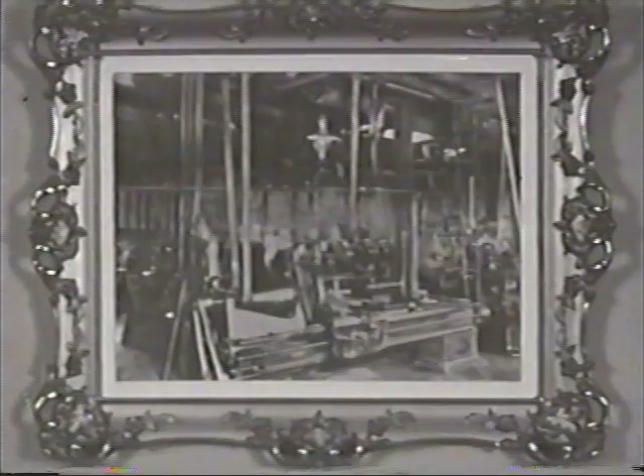This was the same year that a little machine shop was started in the shadow of the budding automotive enterprises in Detroit, a business that was to parallel in engineering development the growth of this first mass production industry. Established by Milton O. Cross and his father, Charles W. Cross, this company began building what is believed to be the first valve-in-head gas engine.

But in this gas-lighted era of the automotive industry, practically all Detroit shops were drawn into production of some needed parts for the assembled cars of the age. Cross, being gear specialists, among other things, became a major supplier. There were transmissions to build, steering gears, timing gears, and axle differentials.

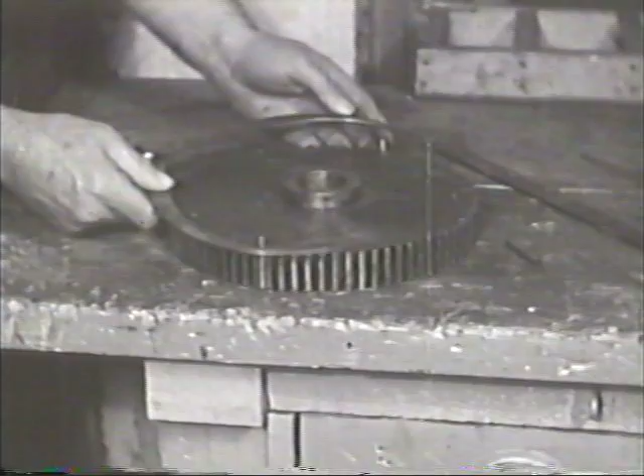And how well I remember driving some of those old Cross-equipped cars. Chevrolet was one of them, and Paige, and Henry Ford's Model T. Then others were the Saxon, Columbia, Liberty, and Scripps Booth. Wonder what ever happened to them. And when I was in Italy during World War I, I remember riding in a Cross-gear-equipped Fiat. I thought I was a long way from home, but I was still in Detroit's backyard.

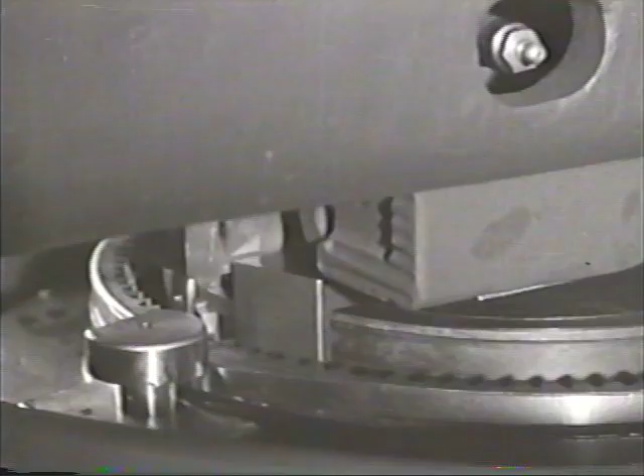To form all these gears, Cross engineering genius had been called upon to design and produce superior machinery for tooth rounding or chamfering. The results were so admired by all gear users that an immediate market of great proportions was available for these new basic tools, carrying them into almost every civilized nation in the world. That was the beginning of the envied Cross reputation for the designing and building of special machines for industry.

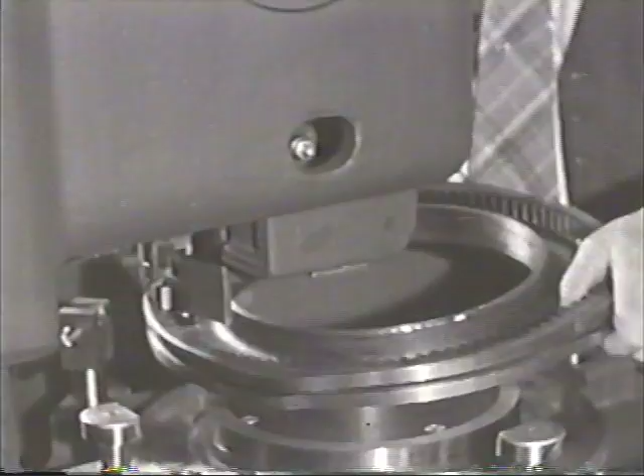During the boom years that followed, their engineering eyes looked farther afield to the many machining operations that could be similarly served by an unusual knowledge of intricate motions and timing and methods of improving accuracy and efficiency in metal cutting. Machines that would be push-button operated, machines that would perform any one or a series of operations simultaneously or in program sequence. Machines that would be built around the requirements of a part, rather than attempting to adapt a number of standard tools to its manufacturing needs.

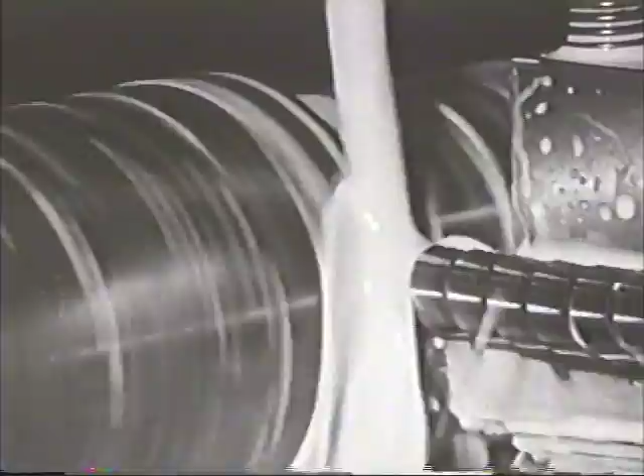Machines that would apply the automaticity of a screw machine to the production of any part and any series of metal cutting operations. Process machine tools. Here in the minds and on the drawing boards of this forward-thinking machine tool builder, the means for an entire new era in manufacturing began taking form.

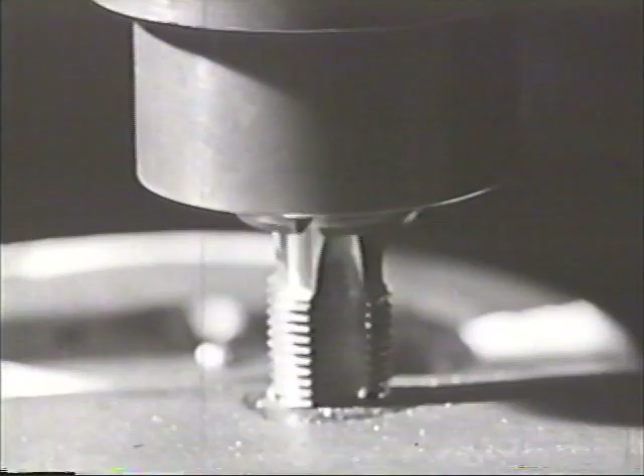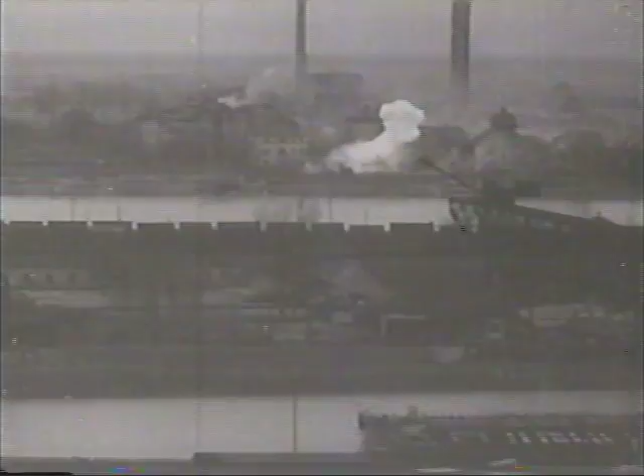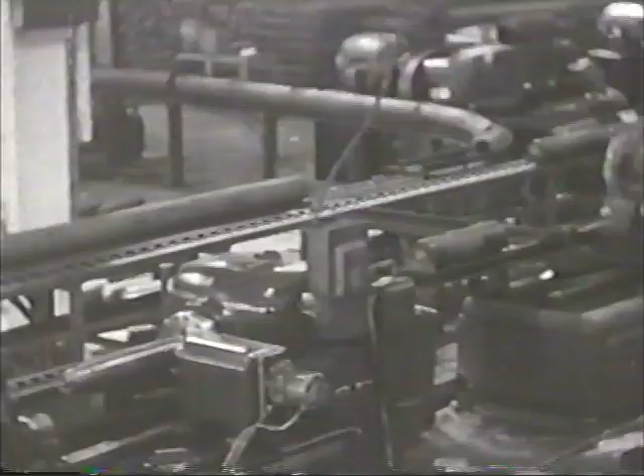Then came World War II. Cross, like other key plants in our production picture, temporarily set aside projected developments for consumer manufacture and fell wholeheartedly into the production of the needed tools to fashion the machines of war. Tools built for the greatest production job of all time. To Cross fell a task which would prove their ability to back their engineering talent with manufacturing facilities equal to, probably, the greatest peacetime demands that would ever be placed upon them.

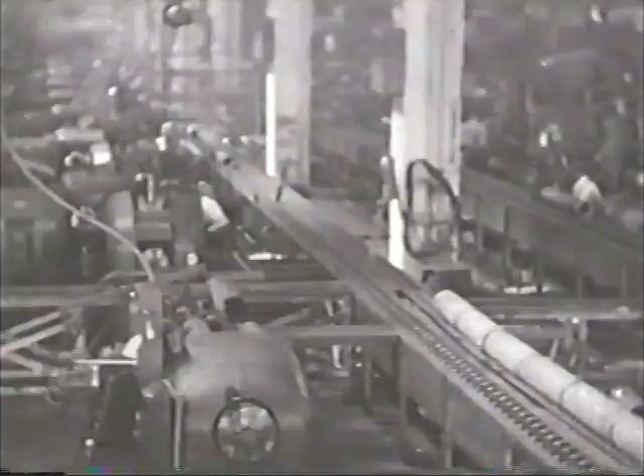The task of supplying shell-turning lathes to equip 14 great plants in the war effort, from Pennsylvania and New Jersey in the east to Missouri, Michigan, Wisconsin, and Minnesota in the Middle West, and Alabama and Texas in the south. Time was the essence of the contract.

Cross engineers were ready with the machine designs that would rough and finish turn shells like these at tremendous speed. Multiple tool machines that would hog off metal chips 1 1/4 inch thick and rough turn this 240 millimeter shell, for instance, in minutes instead of hours. Finish turning in a correspondingly short time.

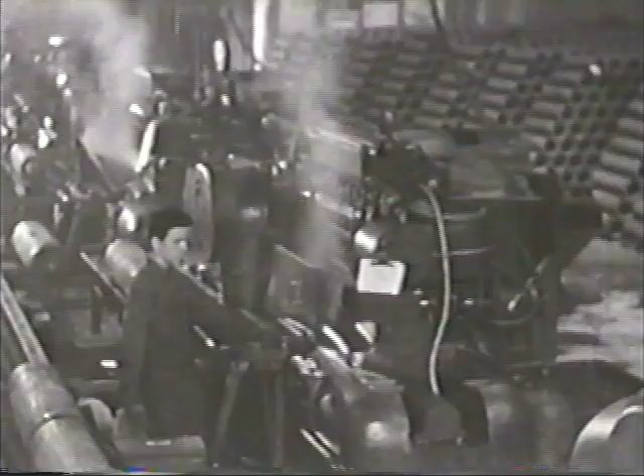This gigantic order, numbering hundreds of lathes, was delivered on time to provide the shell manufacturing capacity which played so big a part in shortening the war. Want to buy a shell lathe? Of course you don't. We all hope their need will ever continue to diminish.

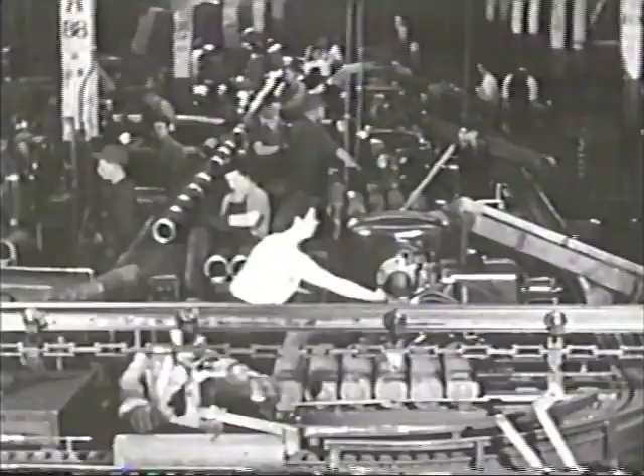But let's look at some of these remarkable lathes on which the battle of production was won, making possible final victory in the field. Let's see what stuff these tools are made of and picture from their performance the production to be expected from machine tools of the future.

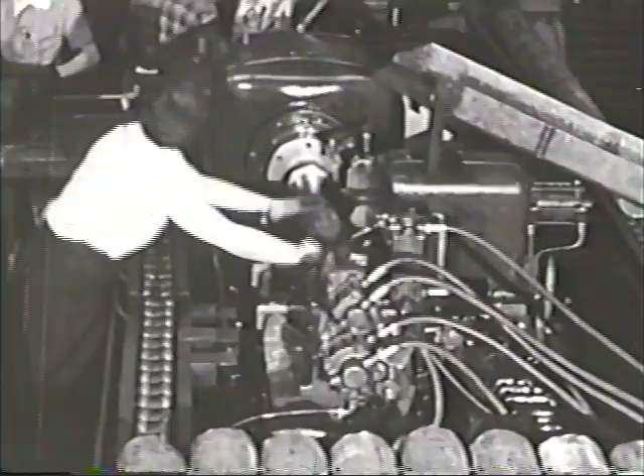Here we see the centering and cutting off operations on 155 millimeter shell rough forgings. There goes one of them on its way, and the cut-off section is disposed of. Next, notice how simple it is, even for this girl, to handle these heavy forgings from conveyor to position. And the machine loads itself and starts the cut at the touch of a button.

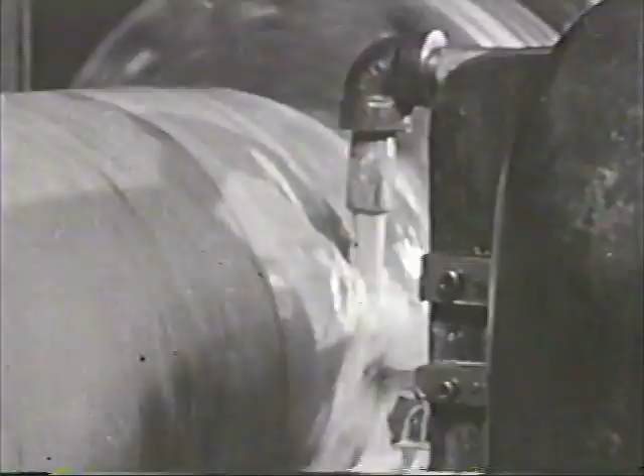This close-up shows the cutting tool digging deep to slice off this tough steel forging to size for its next ride through the rough turning lathe. Simultaneously, on the closed end, the forging is centered for the turning lathe's tailstock. Notice the irregularity of this forging as it revolves, and you will understand the importance of this operation.

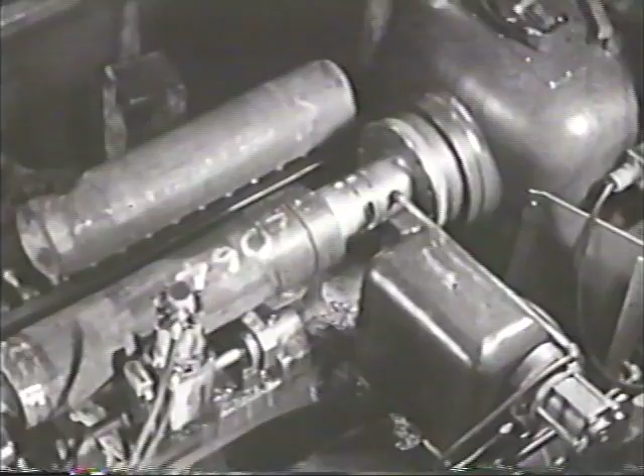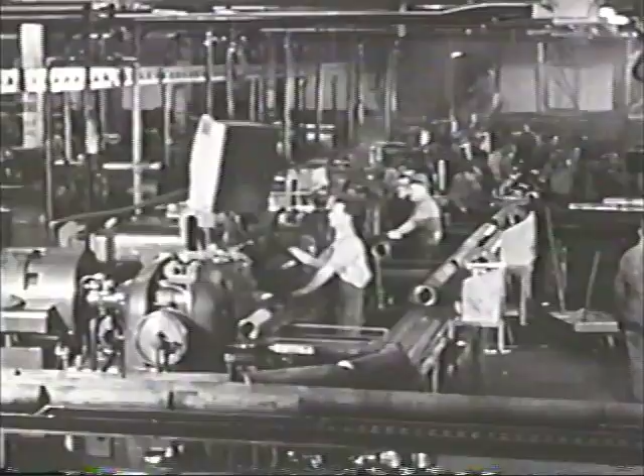But we have just started. Let's get on to the rough turning lathes that these machines are feeding in this mad pace for greater and greater production. As I walk down this line of Cross roughing lathes that seem to go on and on into infinity, listen to the shriek of the cutting tools and smell the unmistakable odor of hot oil vapor hanging in the atmosphere, I really knew I was in an arsenal of democracy.

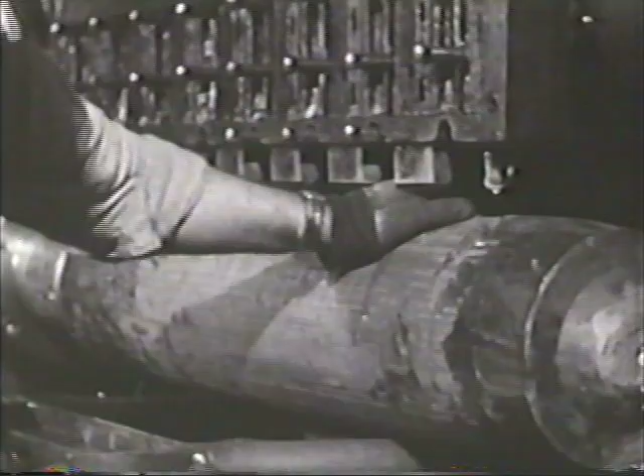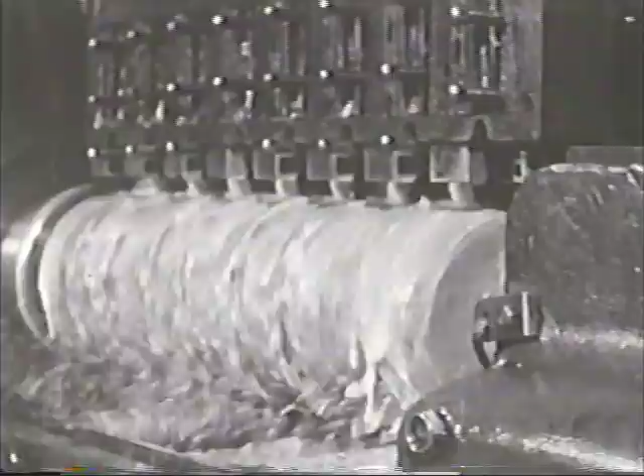Yes, these Cross machines are record holders in rate of metal removal. Let's watch one of them turning a big 240 millimeter forging. There it goes, and down come 8 tools to hog off the metal in 3/4 inch chips. That forging weighed approximately 540 pounds when it went on this machine. It will weigh about 384 pounds when it leaves the machine 6.5 minutes later. Boy, that is certainly losing weight, 25 pounds a minute.

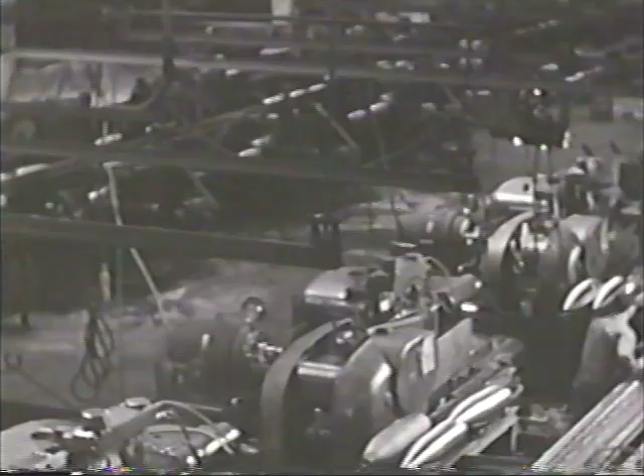But let's get along to the finish turning lathes that are equally ambidextrous. These machines are really big brutes. They have to be to handle these 240 millimeter shells. By the way, those fellows are not loafing. They're waiting for their Cross automatic machines to complete their cycle. And they will be on the job pronto to reload and push the button that sends them on their way.

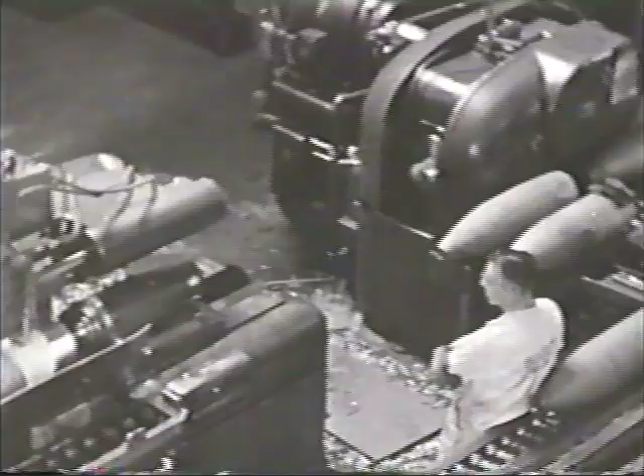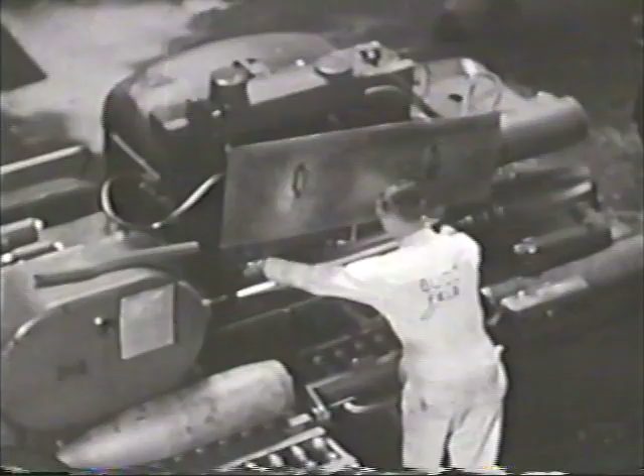No sooner said than done. There's a lathe stopping now, and its attendant is on the spot. When war manpower was scarce, the fact that one man could attend more than one of these lathes spread our productive efforts to multiply our nation's output.

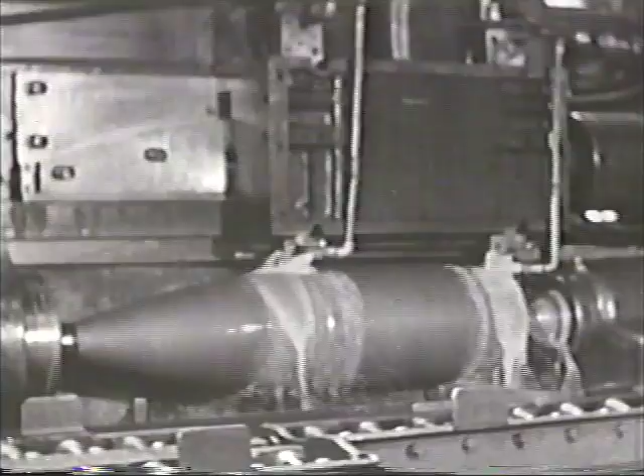Now here's a neat trick to save turning time. Watch these cutting tools feeding toward the left. 2 tools are cutting, but one bides its time. You will see it later. Now with the coolant shut off, notice that 3rd tool I drew your attention to, coming down to cut the burr on the right-hand feed. In other words, this machine catches them coming and going.

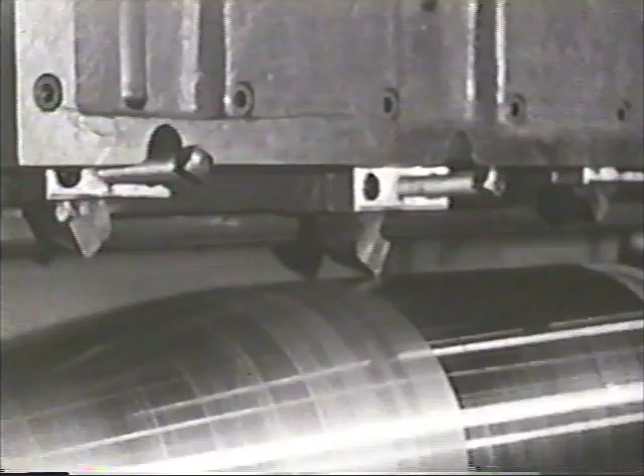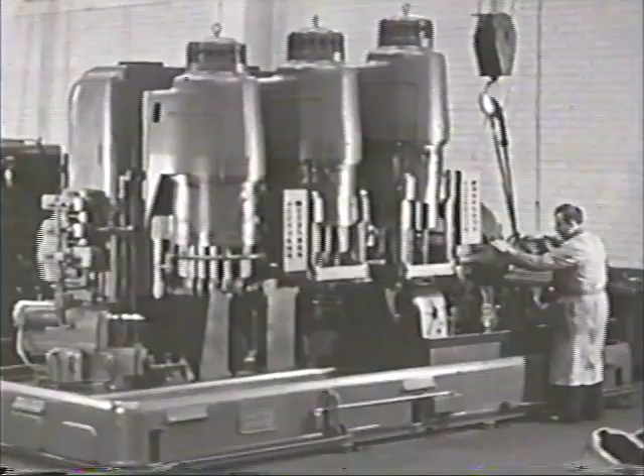And so we leave shell making, an industry we hope will be dormant for many years to come. But we leave it with the consciousness that the Cross tool building facilities demonstrated here, coupled with unique vision and designing skill, has a real significance post-war-wise, offers the promise of a new technique that will greatly affect our business economy. Production at a push of a button, the technique that enhances human skill and multiplies its effectiveness, eliminating an economic bottleneck in production at a profit.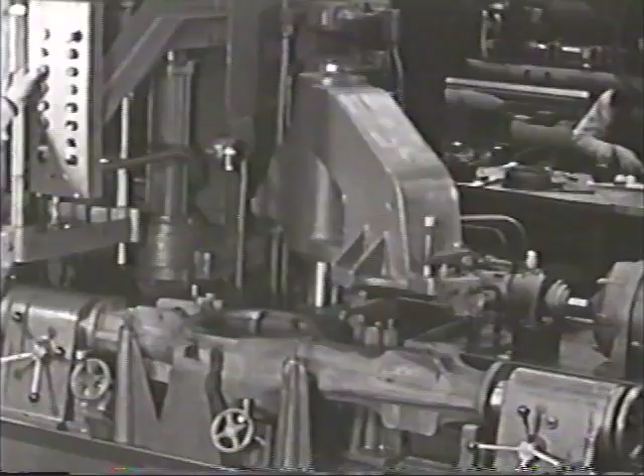I have traveled recently through Burma and India, China, and the Near East, where human toil is the cheapest thing in the world. And I have visited the great plants of the industrialized Western nations, where I saw the wonders of an economic system that has lifted the working man to an estate where he may enjoy more of the luxuries of life than an Eastern potentate. But in all my travels, I have never before seen machines that so multiply man's skill in respect to value of work accomplished as do these process machine tools.

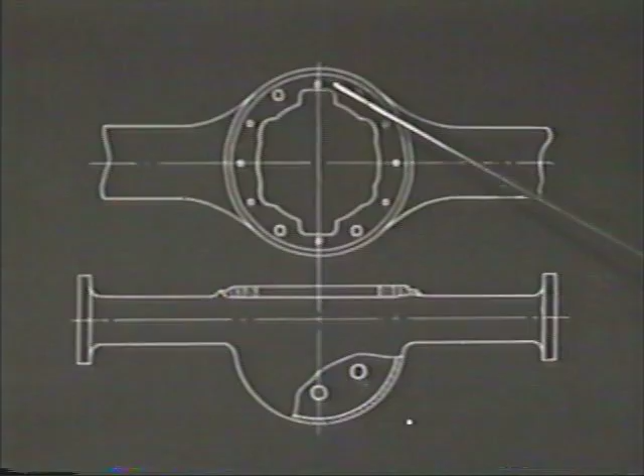Looking at a few of these process machine tools makes it easy to understand just how radically different they are from the old operational tools of the past. Here, progressive gauging, drilling, countersinking, and tapping operations are performed to finish a truck axle housing with 14 holes in 3 different planes. This line drawing shows the problem, and the following sequence shows how it is accomplished, again entirely automatically, at the push of a button.

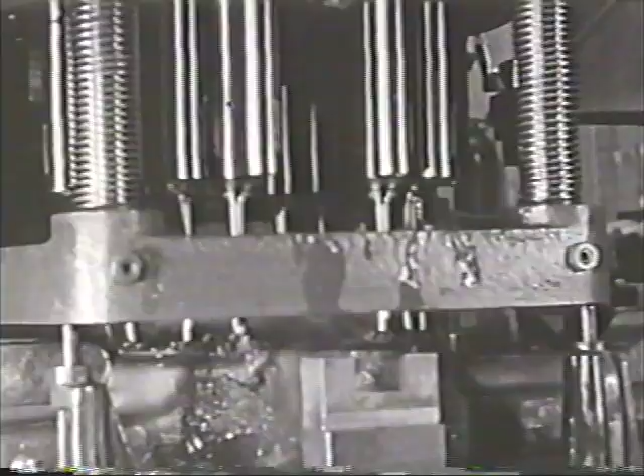As you watch it go through its paces, remember, this machine finishes 6 of these axle housings per hour at 80% efficiency to save its owner $46,900 the first year, while completely amortizing the investment. There's that push button, and the job starts on its way to the second station, where holes are drilled in bowl face and side. This machine replaces 10 conventional machine tools, saves 935 square feet of floor space, reduces the piece cost nearly $5 each. Now to the counter drilling station.

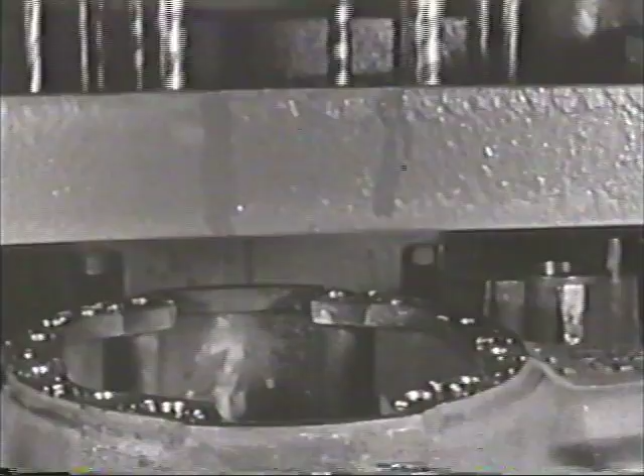This close-up shows the tool arrangement for drilling and tapping different size housings. And finally, to Station 4 for tapping the 14 holes. Job completed, we go back for another housing.

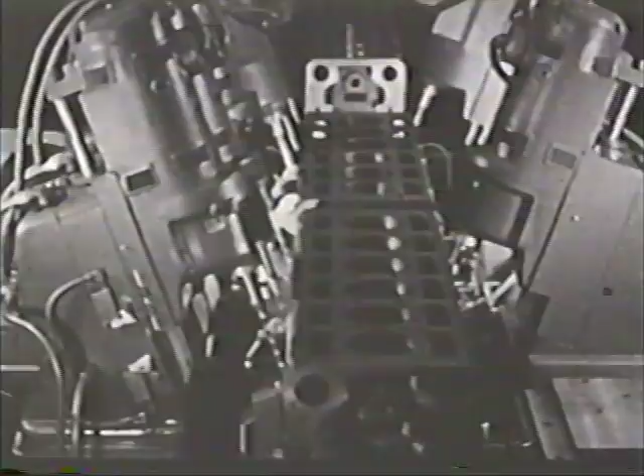While we're looking at drilling and tapping, here is another excellent example of major savings. Take, for example, these diesel engine cylinder blocks, which require 5 angular holes to be drilled and tapped. Cross designed the machine to do this job. Automatically picked up from the conveyor, these blocks are loaded, located, clamped in the machine. The 5 holes shown are drilled and tapped.

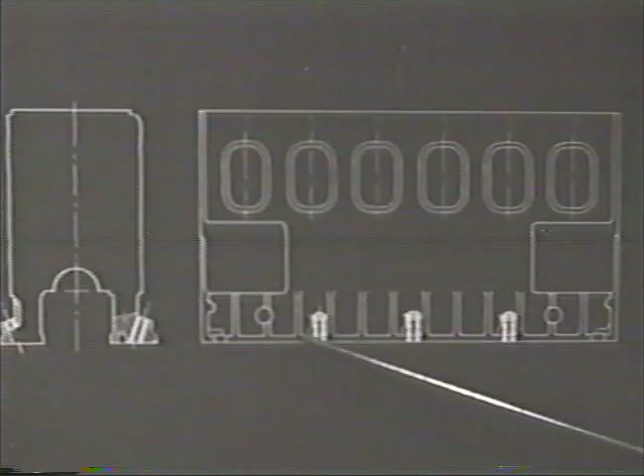The block is ejected and returned to the conveyor at the rate of 45 per hour with 80% efficiency without being touched by human hands. The machine is completely push-button operated. And here's the economic score for this machine over previous operational machine tools required to turn out the same production. A saving of 15 machines and 255 square feet of floor space.

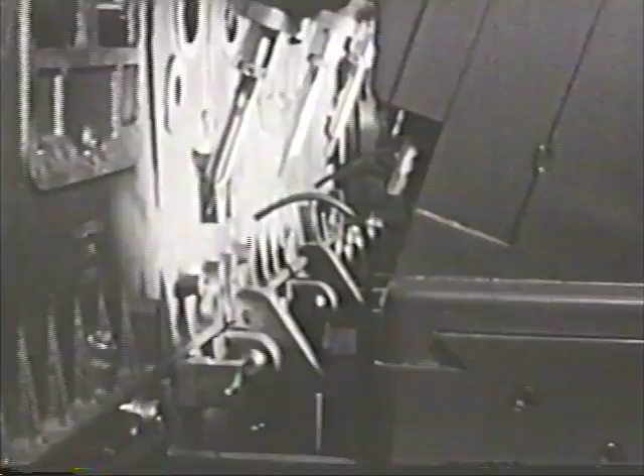An investment of $8,975 less. And a cost per piece, including amortization of equipment the first year, of 48 cents less, representing a total annual saving of $86,400. Who can resist this invitation to profit?

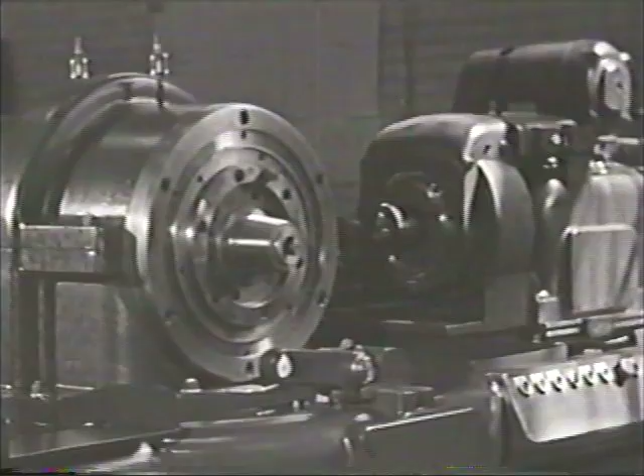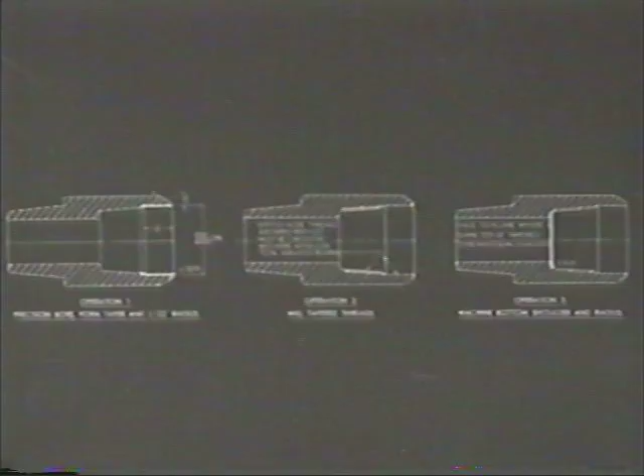Or perhaps your problem is precision boring, or taper thread milling, or precision facing, or all three, as in the case of this large manufacturer of heat-treated alloy steel oil tool joints. This Cross process machine tool accomplishes the results indicated in this drawing in programmed sequence.

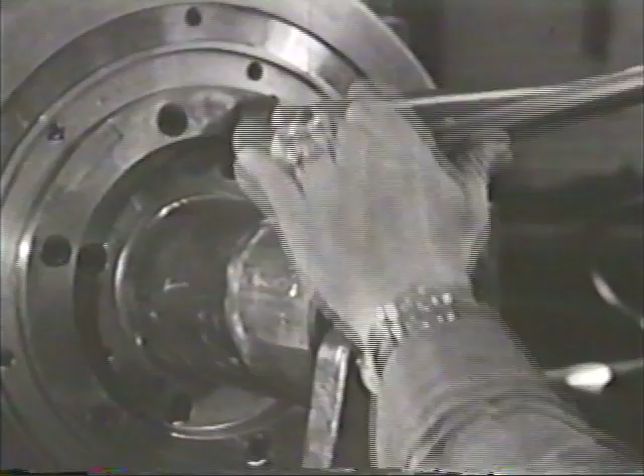Two of these machines finish 16 oil tool joints per hour, do the work of 10 conventional tools, require 22,000 square feet less space. They will save their owners more than $100,000 the first year, in addition to complete amortization of their investment. This man is locating and clamping the work in the holding fixture with a dial indicator. From here on, the work is automatically indexed to all stations. Let's watch it go to work.

$100,000 is not chicken feed in any manufacturing plant, and I thrilled to the timed motion, sequence, and precision that made these economies possible. Indexing to the first station, the piece is precision taper bored, and the 1/32nd radius is formed.

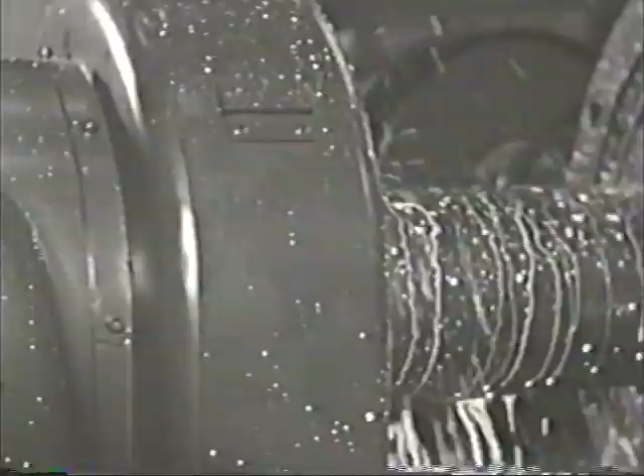Now the machine indexes the work to the rear head for rough and finish taper thread milling. All of these operations are still completely automatic, depending only upon the robot mind and hands of the machine for accomplishment. Here we see the finished thread milling of 6 pitch Acme threads, 3/8 taper per foot, that must be concentric with the bore within 4/1000 total indicator reading. That's nice, accurate work in any man's language.

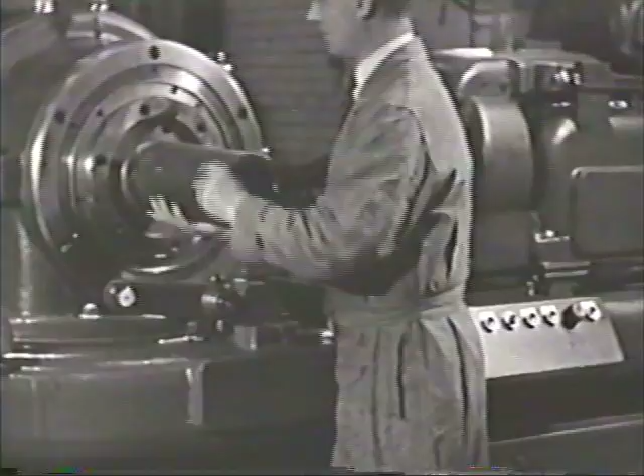And now, to precision face the bottom shoulder and radius, and the job is done. A miracle in metal cutting, performed by a metal mind that cannot err, get tired, or wander off on thoughts of fun, fishing, or family trouble. A result always the same, in always the same time, just as a constant speed motor spins on its merry way. Assured quality, precision, production cost, and profit. That is the promise of the process machine tool.

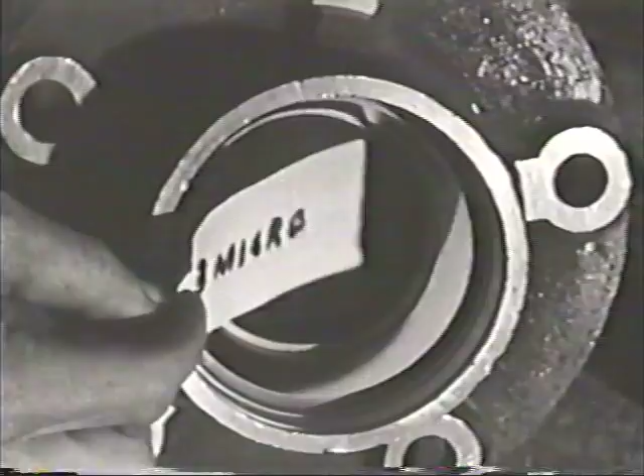Speaking of precision, production, and profit, here's another one for the book. Post-war wheel hubs will have 2 hardened integral taper bearings automatically processed on Cross special machines to 3 micro-inches. These bearings will replace the separate bearing cups shown here.

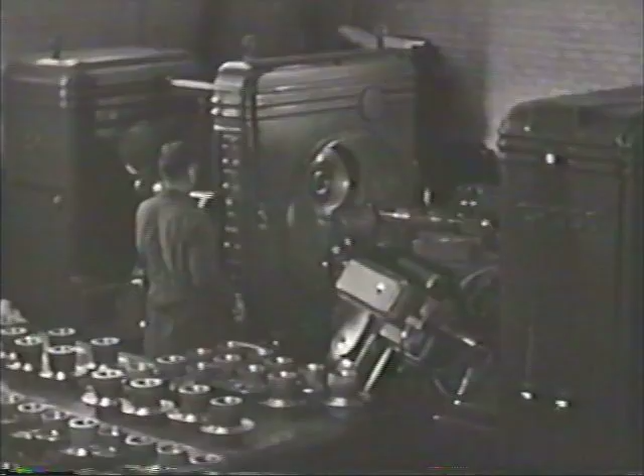Aside from the great savings in eliminating the separate bearing cups, these machines offer the following machining economies over conventional operational machine tool production. At the production of 50 per hour, one process machine saves 3 conventional machine tools, more than $6,000 in tool investment. It reduces the cost per piece to less than 1/3 and nets the first year, after complete amortization of the Cross machine, a total of over $22,000.

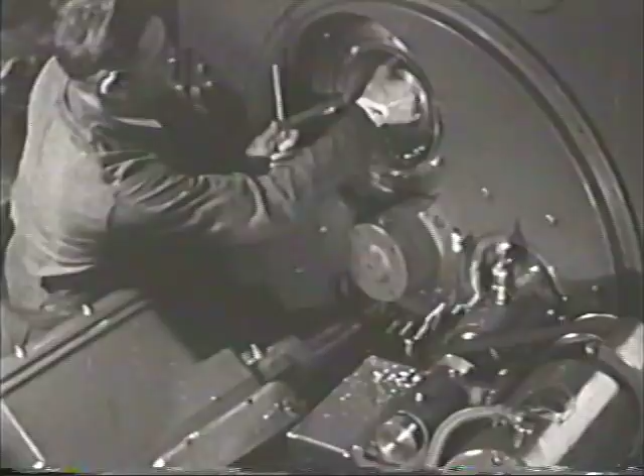This 3-station machine is shown here being loaded at one station, while rough and finish grinding takes place on both ends of the hub at the second station, and honing to 3 micro-inch finish on both bearing faces is accomplished simultaneously at the third station.

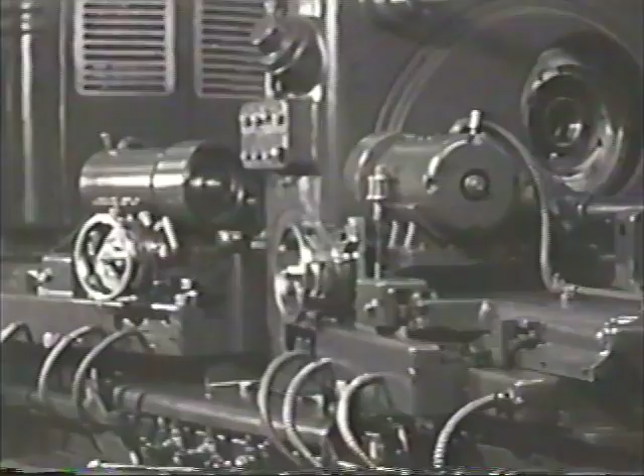Notice the work requires only a single chucking in a self-indexing trunnion-type workhead. This single chucking not only saves handling time and labor, but guarantees absolute concentricity of finished bearings. Another interesting feature of this process machine tool is the automatic dressing of the wheel between the rough and finish grinding operation.

Watch the almost human action of this machine as the grinding heads rapidly advance to the work, settle down to the prescribed cutting speed, rapidly retract for dressing of the wheels, rush back to the finished grinding operation, and retract again at high speed to clear all spindles for indexing.

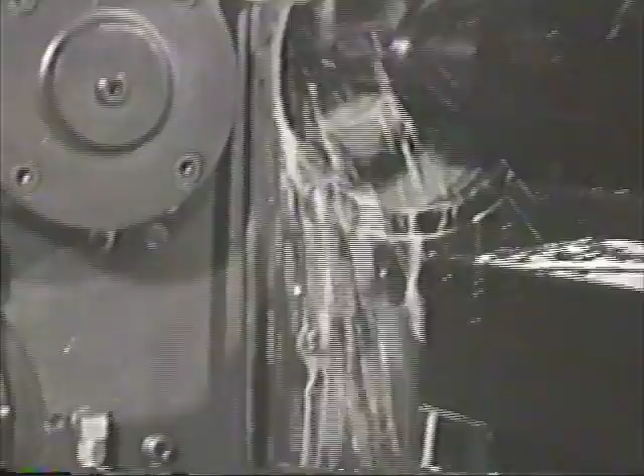All this while, the honing heads are working away in like manner and timed in coordination as though a whole squad of invisible traffic cops were directing them.

Like all self-respecting individuals, this machine washes its face before each bite at the work. And that's automatic too. Grinding finished, all particles of metal and abrasive are flushed clear of the work before the high precision honing begins. Since this washing is done while the work is being indexed, more split seconds are saved too.

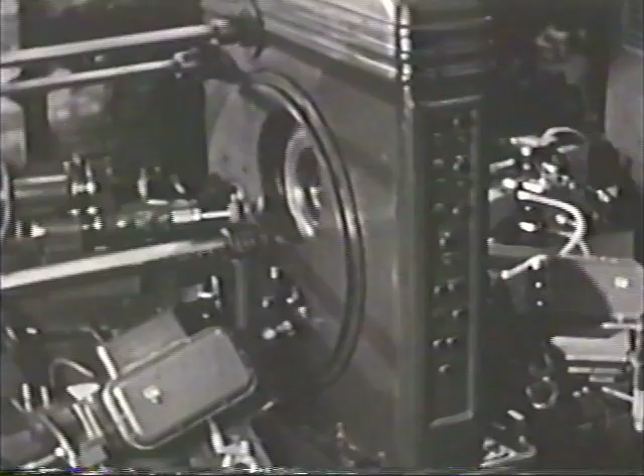There it goes on its way, taking off a 1/3 saving on each of the 50 wheel hub bearings it finishes each hour.

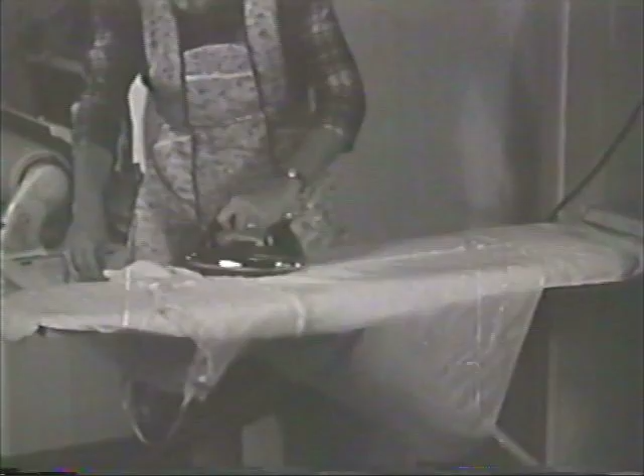So it goes, and from what I have seen of Cross process machine tools in key spots in the production lines of many of our post-war industries, and the amazing economies they are effecting in the manufacture of innumerable parts for the kaleidoscope of products so vitally needed by a war-starved world, I agree with the editors.

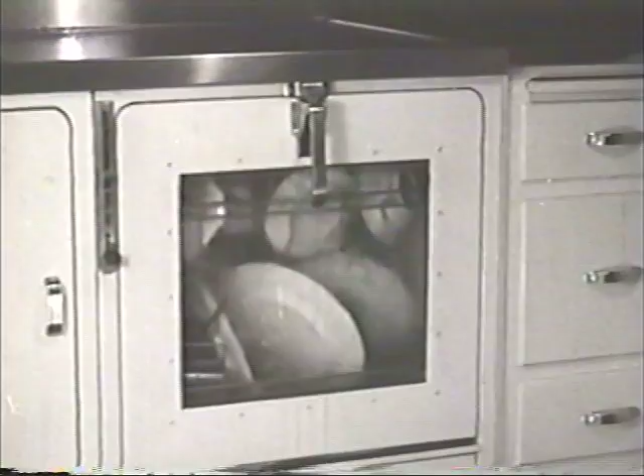These process machine tools are truly the answer to a new prosperity for both industry and labor, not to forget greater value for John Q. Public, who after all pays the freight for all of us.

It was with this interest that I visited the Cross plant in Detroit recently to see something of how these miracles in metal are conceived. Just how, if I were a manufacturer of something more than hay on my Dutchess County farm and yarns for books and radio, these engineers would approach my machining problem.

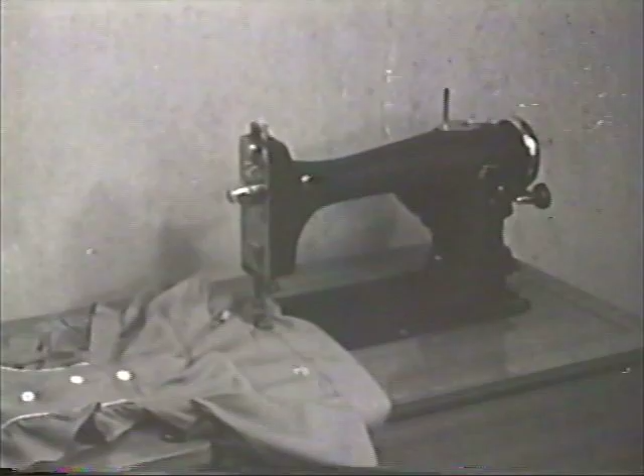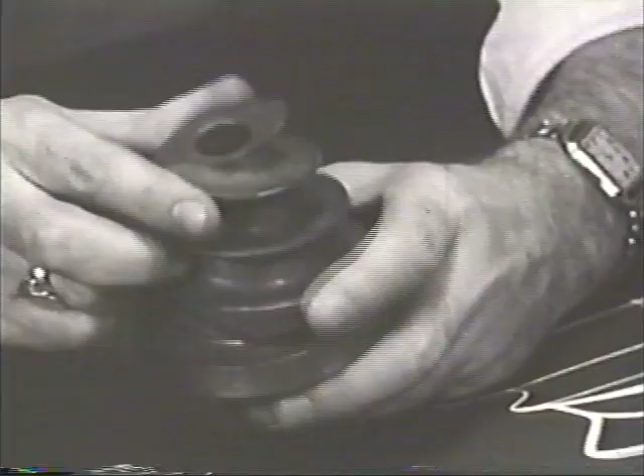Started in this little huddle of men in a conference room, poring over a part which some doubtless had never seen before. This oil drill cutter that goes down into the earth's innards to tap our priceless petroleum resources. Questions of tolerances, production requirements, metallurgy, and so forth began popping about my head. Then the conversation got completely out of my depth in higher mathematics.

But I noticed all these men making notes continuously, and finally they broke up with a definite assignment arranged for each in working out machine motions, timing, powering, production flow, automatic controls, tooling, and last but not least, the economics of the proposed method of machining, preparatory to meeting again and again to merge their ideas and facts into a preliminary design.

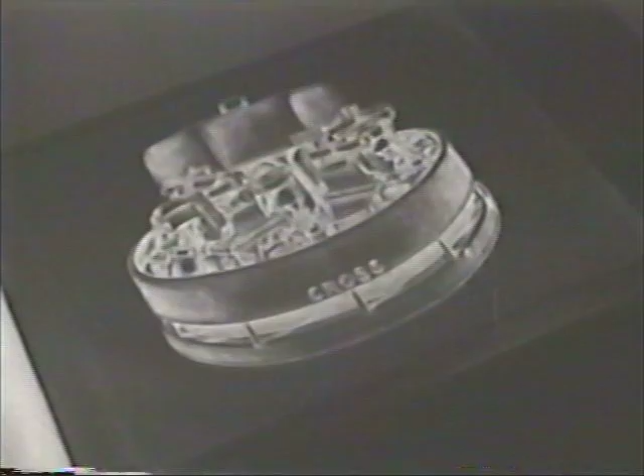And now plans and specifications are ready to go off to the customer for his approval, not with just a price quotation, but with a complete comparative analysis of the cost of producing this piece with the Cross process machine recommended as opposed to conventional operational machine tools.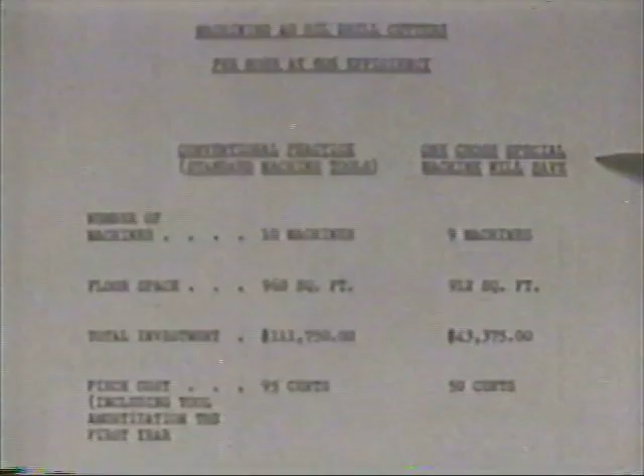Just for fun, let's look at the score for this machine. It must be a good one, for it sold the machine. And it certainly is, as you can see for yourself. Savings of 9 machines, over 900 square feet of floor space, more than half the cost of the finished part, in machining 40 of these oil drill cutters per hour. No wonder they bought it.

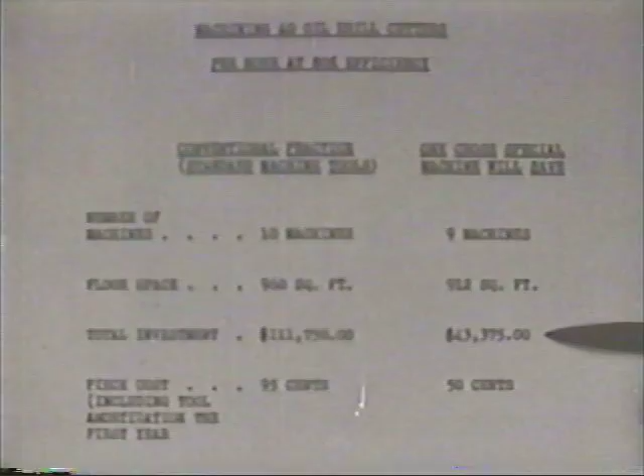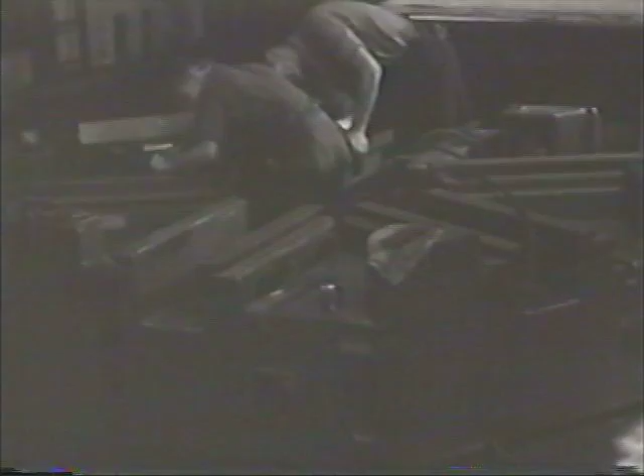Next stop, the shops. I was as anxious as I know you are to witness this idea that we have seen take form on paper actually blossom into a live and working machine. So let's watch some of the operations being performed on the almost countless parts, large and small, that go together to make up this great machine.

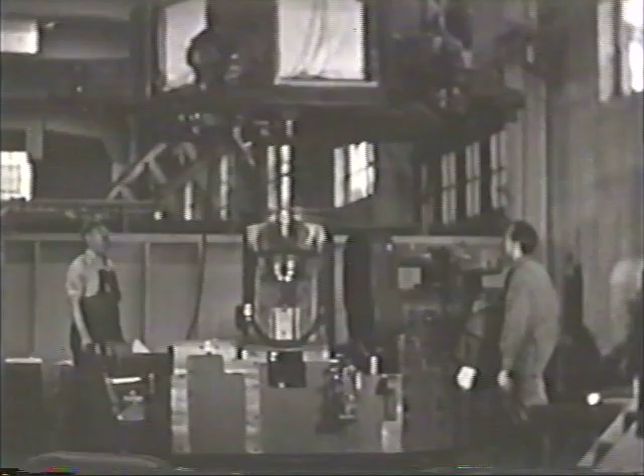Precision begets precision, so these highly skilled craftsmen work to infinitesimal fractions of an inch. Talk about thousandths as though they were a matter of feet. With all their respect for little things, however, these men swing castings weighing tons. They swing them about like bales of hay and assemble them with a nicety that belies their girth and weight.

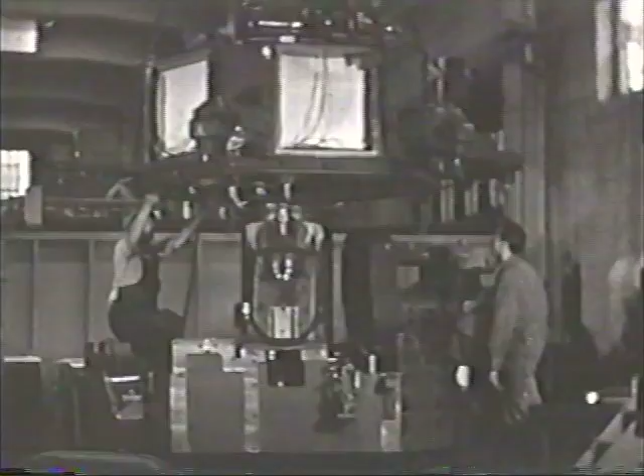Soon the other units will slip into place like pieces in a giant jigsaw puzzle, and we will see the machine go to work. Incidentally, these shops are a show place of order, cleanliness, and efficiency, even in such a city of great industries as Detroit. To my mind, they represent the fourth of the 4 outstanding qualifications which the Cross Company offers, justifying their reputation for leadership in the special machinery field.

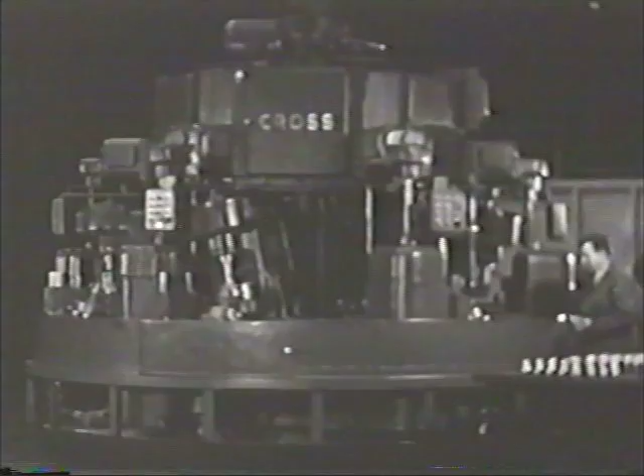These 4 qualifications are: vision, to foresee the profitable application of process machine tools and to project their advantages in terms of hard, cold, economic facts. Experience in building special machines, in developing intricate motions and timing, in applying automatic controls and devices.

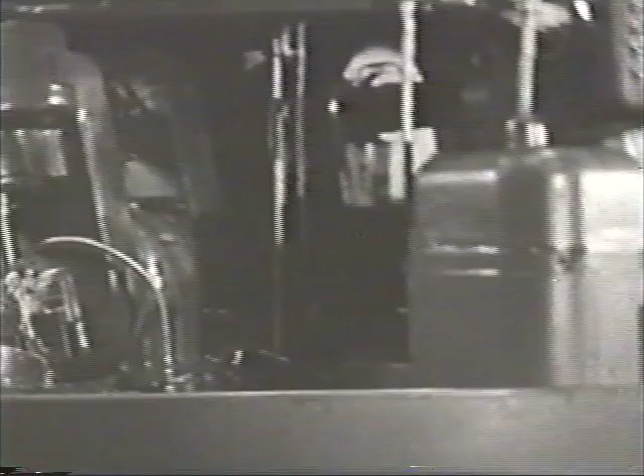Designing skill, to combine wide and varied experience to produce machines capable of simultaneous and programmed operations built around the requirements of any product. Facilities, capable of supplying the special machine requirements of any manufacturer.

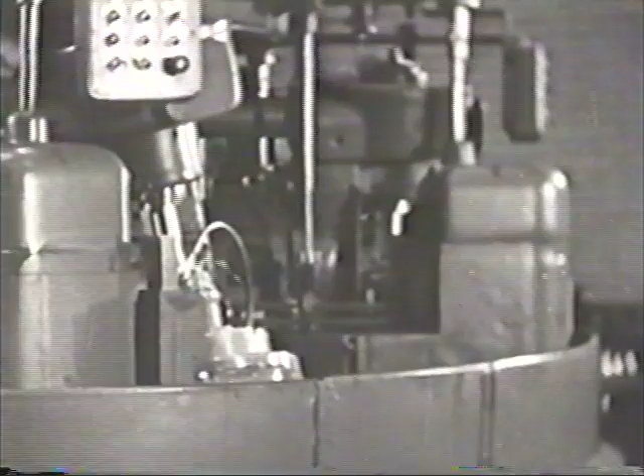And now, as you watch this cold steel incarnation of the fragile fabric of an idea go to work for the first time to advance our industrial progress another notch, I'll say so long and thanks for a most interesting preview of things to come in a new manufacturing world.